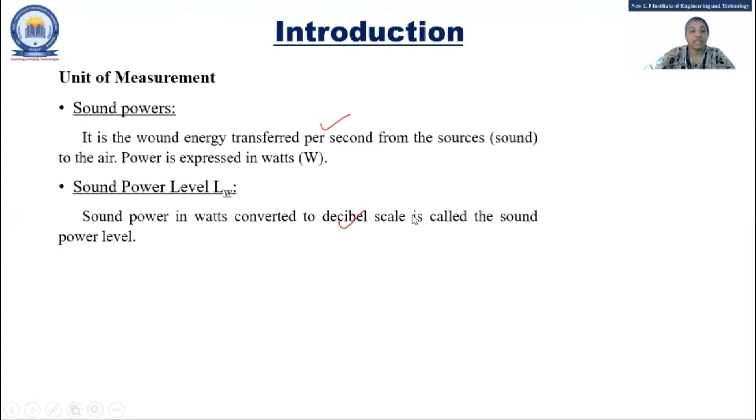Same way, sound pressure is the amount of air pressure generated by the fluctuation from the source of the sound, measured in Pascal. If that is converted into decibel, it is called sound pressure level. So normally these are the measurements for noise pollution.

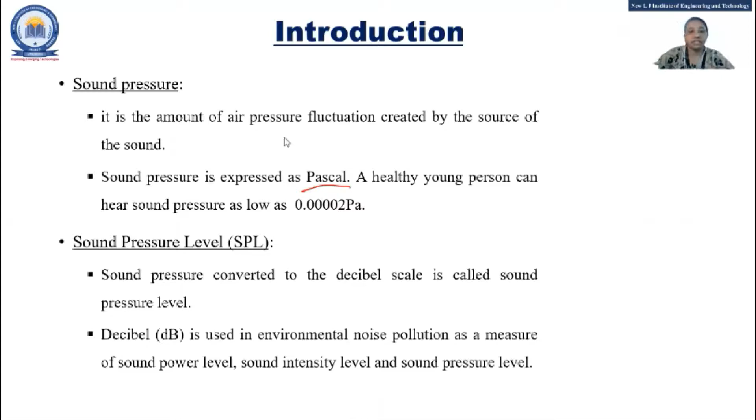Normally it will be measured in that term, pressure and the other is sound power. Now after that, we have seen the noise rating system.

So we know that if we are going to measure the noise for some interval of time, it may be continuous, intermittent, or in an impulse. So there will be a different pressure level at different intervals of time.

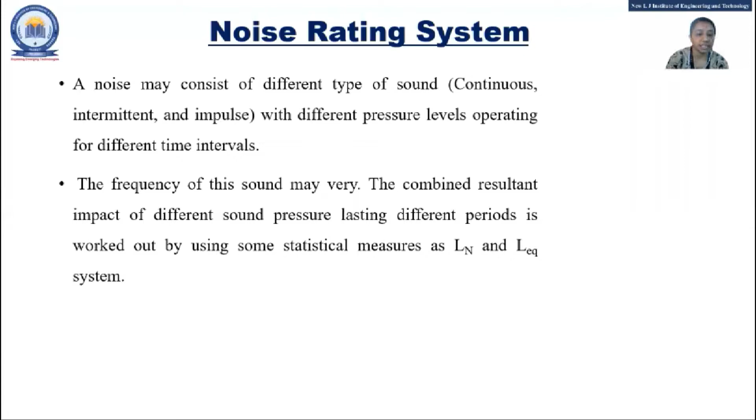So how to measure that? For that, two statistical measures are used, Ln and Leq. Ln, that means what? By example, we have seen that, for example, the given 70 dB is the value of L60. That means Ln, L60 equals 70. So what is the meaning of this?

It means the sound level will exceed 70 dB for 60% of time. That means if we are measuring for 3 hours, then for 60% of 3 hours the sound will exceed 70 dB.

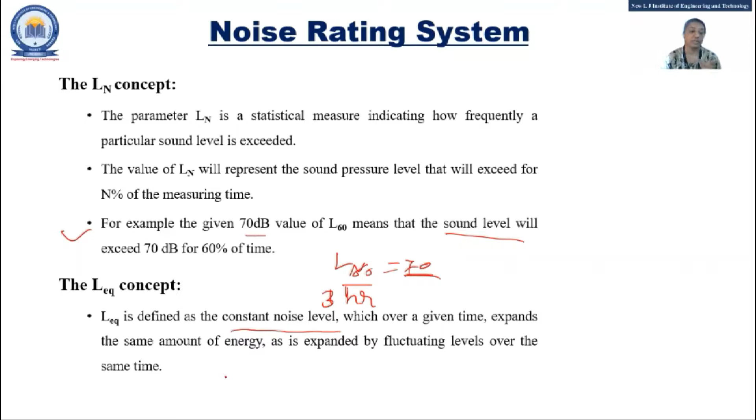So that is the meaning of Ln. And Leq is defined as the constant noise level which, over a given time, expends the same amount of energy. So whatever fluctuation level occurs over time, that is nothing but Leq. So this is the noise rating system.

Now some ambient standards have been specified according to area. You can see there are 4 categories: industrial area, commercial, residential, and silence zone. In that, the decibel levels for noise are defined for daytime and nighttime. Industrial area can be understood well by the name itself.

Now silence zones, that means what? Can anyone define which zone will be considered a silence zone? Anyone?

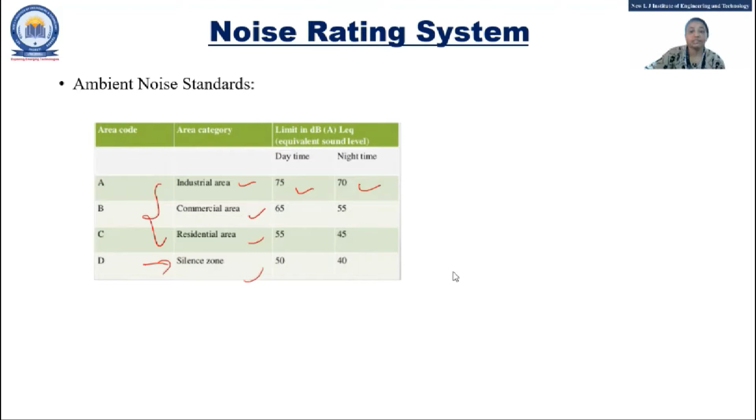Yes, which zone will it be? So whatever zone is near the hospital, near the institute, suppose any court is there, or library, school - that means any institute, right? So the area which is near to this type of things will be considered as the silence zone, with daytime 50 dB and nighttime 40 dB.

Fine, so this is what is called the ambient noise standard. Then what happened is the acceptable noise level for the residential area - so again it will be divided into outdoor and indoor.

So indoor means the sounds of TV, radio, music room, hospital, if any auditorium is there, conference room, private offices, libraries, restaurant - all will be indoor noise level. And outdoor means rural areas, suburban area, urban area, residential area, city area, industrial area. So this will be divided mostly into two parts, indoor and outdoor.

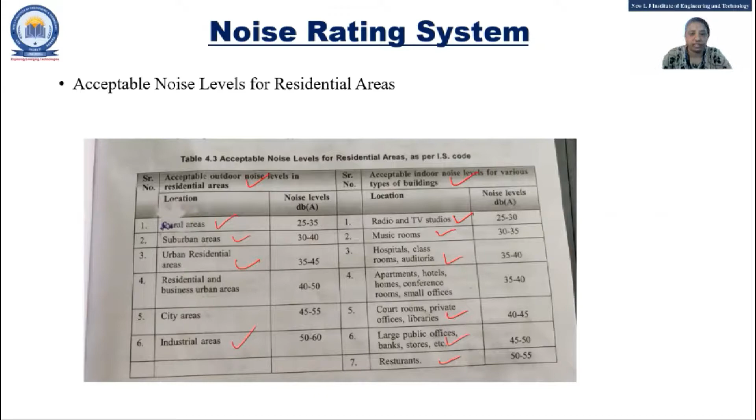That much we have seen, right - the noise rating system, the ambient standard, and the acceptable noise level for the residential area. After that come the sources - whenever any pollution is there, what is the source of that and what is the effect of that, that will be the main questions. So there are four categories, classified into four ways according to the source: traffic source, industrial source, constructional source, and other miscellaneous source.

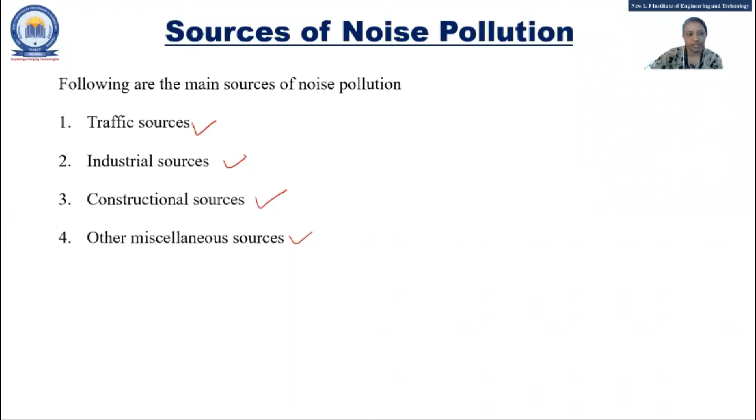So we'll start with the traffic source first. This source is an easy one - without even reading from the book you can write it down if asked. Traffic source means it will include any vehicle used for transportation, like truck, tractor, train, bus, or aeroplanes - whatever things generate noise. That is called traffic pollution, and because of them air pollution is also supposed to be there.

And the examples given are like the horn of vehicles - we blow the horn many times even if it's not required. Then also a vehicle with a damaged silencer will produce some noise from the silencer. The noise produced by a diesel car will be more than that produced by a petrol car.

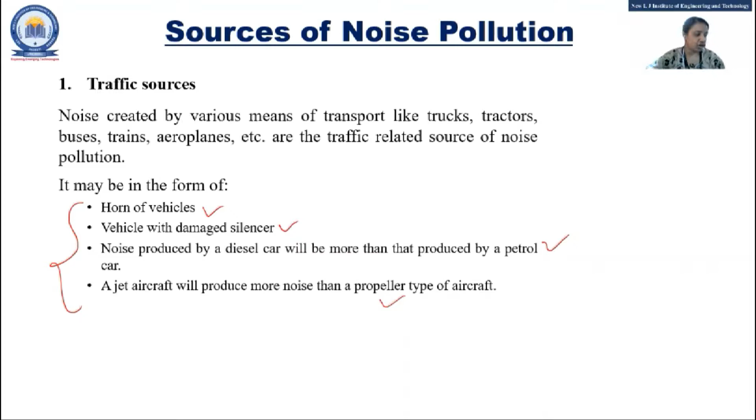Whatever noise we have also observed, the jet aircraft will produce more noise than the propeller type of aircraft. That means the main thing is the noise generated because of the unpleasant sound that comes from the vehicle. So these are all called the traffic sources. The next one is the industrial source.

Industrial source means we know that if nearby us any industry is supposed to be there, the noise will be produced, or we have observed that surrounding us if any construction work is going on, then also it will make a problem.

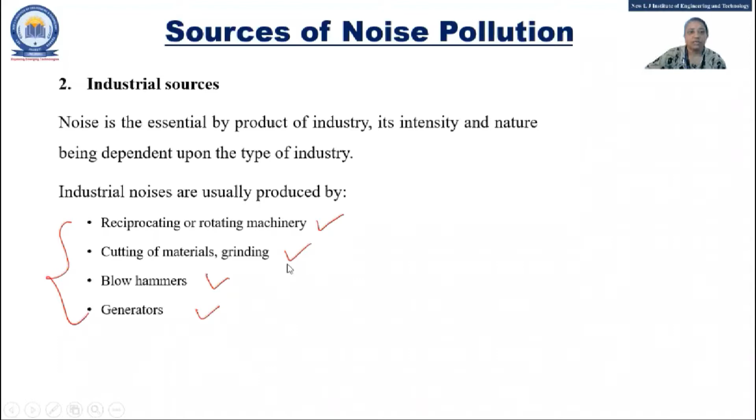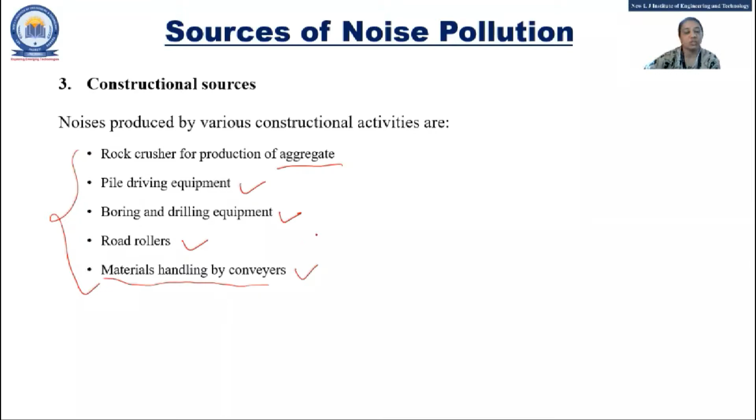First we have seen traffic sources, then industrial sources, then the constructional sources. They have defined it separately from industry because so many noises are generated from that - rock crusher for production of aggregate, driving equipment, drilling equipment, road rollers, materials handling by conveyors - they also make so much noise. So whenever the construction site is there, the noise coming from that side is more.

Okay, the other one is the miscellaneous source. That means it will again be divided into some parts according to where, or what is the source of that, in a residential area.

The loud voice of TV, music system, radio - that we have observed, right? Whatever the neighbors are used to, whatever volume of TV or music system is there, for us it may be louder, so that will be noise for us. Public address system means public functions or festivals, say like Diwali, then noise of crackers.

We can say if Navratri, then the sound of a music system - so that will be public address system. Any other example can you give of public address system? Festivals, Navratri, Diwali, then any other public function which will be a source for noise.

All are there, na? Yes, Uttarayan - so many noises there in that also. Yes, political rallies. So if any marriage is there, then yes - so most of our functions are sources of noise pollution.

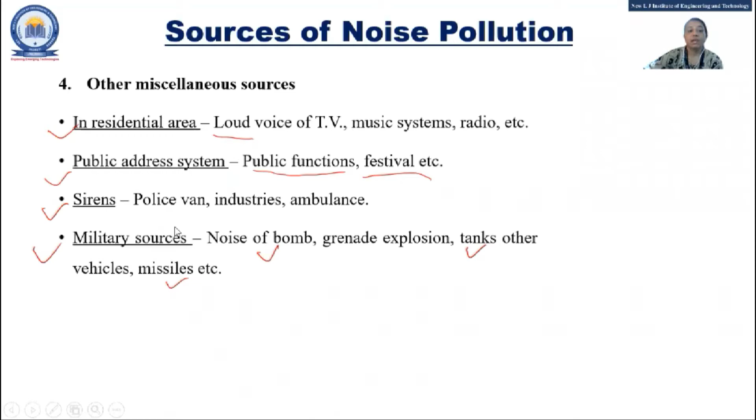So these all are residential, public address, sirens, and military sources - these are the four types of sources of noise pollution. After that, what about the effect? The effect can be categorized into 5 ways.

You can see loss of hearing - if the noise is for a longer time and continuous for, say, the whole day, longer time, and it is loud, then loss of hearing can occur. Annoyance. Health effect - what are the effects on health? Then interference with communication - if a serious meeting or communication is going on, it will be affected. Then working efficiency - we will see that too.

The first point is loss of hearing - so we'll see what to write about that. Loss of hearing will occur due to exposure of noise, which is termed artificial hearing loss. This is divided into two parts, as I have told you.

It may be for a shorter time or a longer time, and according to that it will be divided into two parts: the noise induced temporary threshold shift, named NITTS - noise induced temporary threshold shift. This is caused due to exposure of a loud noise or music, anything, like the bursting of crackers.

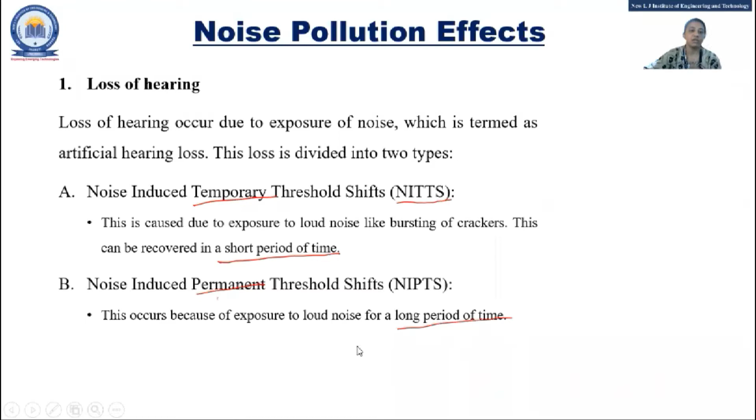The next is annoyance - this is the subjective matter of noise. As we defined noise earlier, it depends upon the situation and circumstances. For example, someone playing guitar - for them it is a sound, but for others it will be a noise, same with classical music. So for someone it may be considered a sound, for someone it will be considered a noise - this is annoyance.

Health effect - health effect will be the effect on physical health and effect on mental health. There are two types in that, and maybe it is not given in the book.

Okay, take a screenshot of this - second, third, and fourth point. This isn't given in the book, so just take a screenshot of that. That is fine. So health effect, that means what?

The effect on physical health and effect on mental health. Again, in effect of physical health, there are two types: auditory effect and non-auditory effects. So auditory effects, that means what? They are grouped into short time and long time effect.

That means what? We can say acoustic trauma is caused by very high intensity impulsive noise of about 150 dB or more. So if the noise measurement is more or about 150 dB, then there can be a problem on human health.

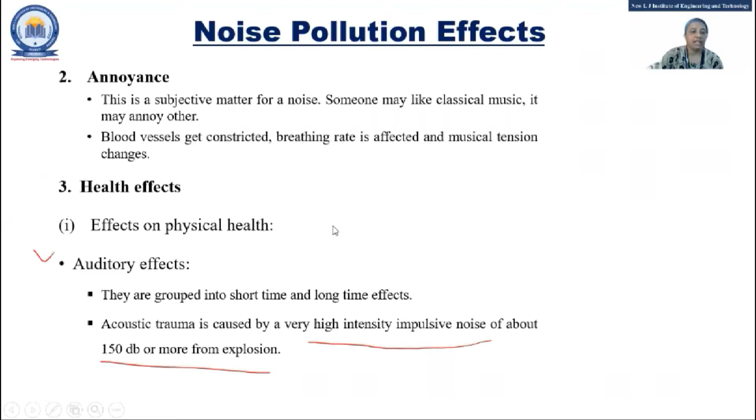Okay, so that is the non-auditory effect. Again, effect on mental health and physical health - in physical health, it will be either auditory or non-auditory.

Effect on mental health: because of noise pollution, there will be a very less effect on mental health, right? It is not that much level as it will be because of some gases, like we have seen in air pollution. So there will only be less concentration if any noise is there for some continuous time.

Interface, fourth one - interference with communication. That means what? If we are talking or some meeting is going on, then the person may face the problem of trying to understand what is being conveyed by the other person. If there is any background noise or something like that, then it interferes with communication - we are not able to understand the concept.

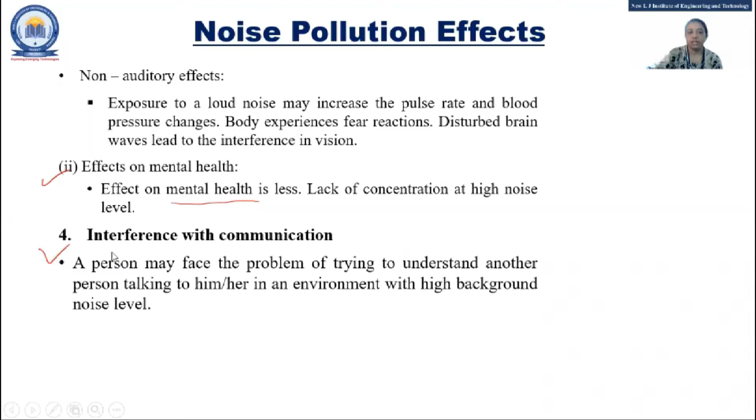Okay, so that is fourth number, interference with communication. Working efficiency - sometimes our work area is in such a noisy environment. Surrounding us could be some industry or firm which will be the main source of noise. At that time, what happens? Our sleep is disturbed.

There's increased industrial accidents, and personal comfort interference - that means whatever our schedule is, because of the noise, it gets disturbed. Property value degradation, yes, that means what? Can anyone give an example of that?

There's also an effect on wildlife - that means if any noise is there, it will affect the animals too. Can anyone give the example of this property value degradation because of noise pollution? Can anyone? How will it be there?

You can say the situation of your house - if a property is near a source of noise, then we can say the property value is degraded. Can anyone give an example of that? No one.

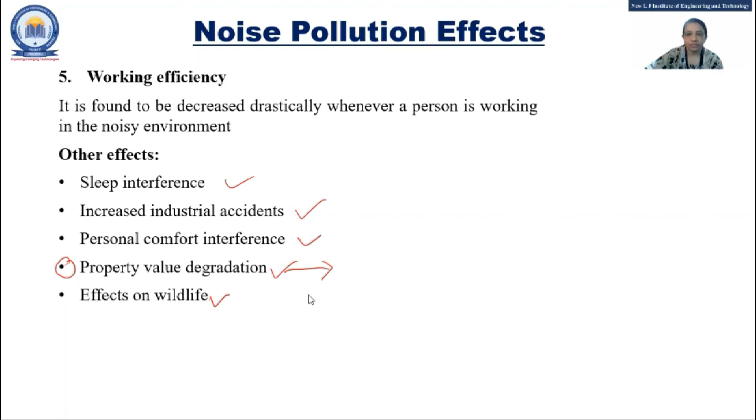Okay, now how to control it? So what are the sources, what is the effect, and how to control it - those are the main things. The proper maintenance and lubrication of machines can reduce the noise. We have seen that in construction sites, right? Because of machinery and all that, noise is there, or if it is any industry, or a house near the railway station as I told you.

If it is near the railway track or near the airport, that kind of noise source can be there. So proper maintenance and lubrication of machines is required. Then we may be able to reduce the noise. This control means we can't stop the process, but we can at least reduce it. Sources of noise pollution like heavy vehicles, airports, and noise-producing industries should be located away from what?

A residential area or a populated area. So mostly we have seen that airports are at the end of the city only, right? It will be far from the rest. It should be far from the residential area.

Silence zones should be created around residential areas, educational institutes, and hospitals. So we can say 1 kilometer nearby these residential, educational institutes, hospitals, or government firms should be considered as a silence zone. So whatever the standards are given in decibels, that should be followed.

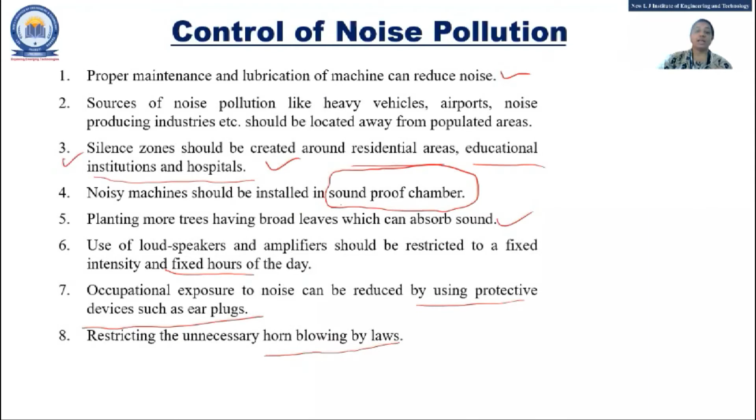So we have seen what is the difference between sound and noise, the rating system, what are the sources of noise pollution, what is the effect of noise pollution, and how to control it. Now, what questions are supposed to be asked from this? You can see: difference between sound and noise; discuss the effect of noise pollution and its control; short note on source and effect. So mostly you will find all the questions are on source and effect.

And sometimes it will be asked like: explain what do you understand by acceptable noise level. So in your own way you can explain what is the meaning of acceptable noise level, and briefly describe the sources and effects of noise pollution. Then, what is dB—decibel. Then how to control noise pollution. Mostly these are on causes and effects.

Discuss the control of air and noise pollution—so this will be from the same unit. Sometimes it will be asked in that way also. Or it could be about the effect on human health—just you need to write on human health, and it will be for 4 marks. So you can give examples also. In this way, it can be asked.

These are sample questions that we have taken from the GTU papers. So this is unit 2, covering air pollution, water pollution, and noise pollution. After that, there is one more topic, and if you refer to the book, that will be in a separate chapter—I think chapter 4, noise pollution—but it will be covered in unit 2.

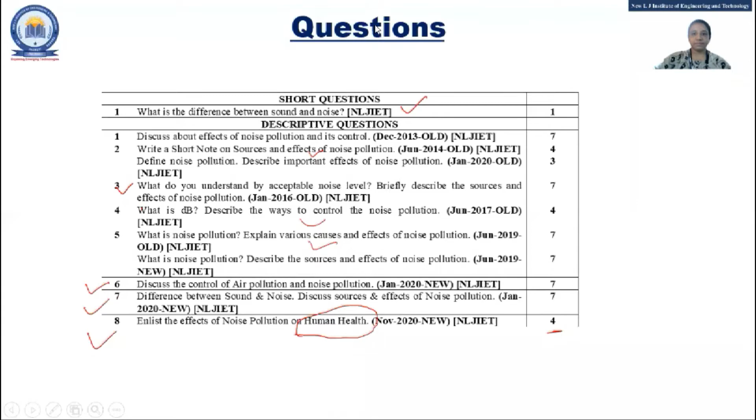Now, the next topic we are going to start today is solid waste. There are 3 types of waste: solid, biomedical, and e-waste. So we will start today with solid waste. I'm ending this session, just rejoin for another 20 minutes. So the last topic in unit 2 is solid waste, biomedical waste, and e-waste. Today we are going to cover only solid waste.

So in that, whatever waste is there, it will be divided mainly based on how it will be generated and how it will be managed. Normally, whatever question is asked depends upon these 2 criteria: the generation and management of either solid waste, biomedical waste, or e-waste.

So, what is the meaning of solid waste? Can anyone tell me examples? According to you, what is e-waste? Already we have discussed this in unit 1 also, right—electronic waste. The computer and IT people manage it very carefully, e-waste—what material is used to make an electronic gadget and all. Biomedical waste—what is the meaning, I am asking. Solid waste and biomedical waste, can anyone tell me?

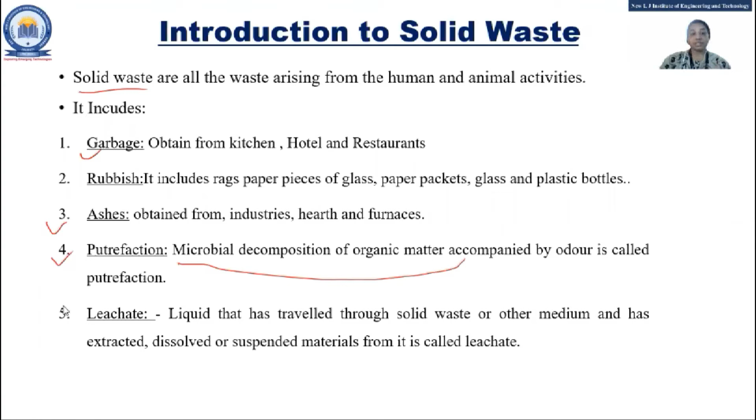So that we will see how it is supposed to be managed. Okay, so first we'll see what are the types and sources. So normally this waste is going to be divided into three types, that is municipal waste, industrial waste and hazardous waste. So municipal waste, that means what? Can anyone? Municipal waste means it is the waste that will arise from the home, or we can say any household activity is there, right?

Any household activity is there. So whatever waste is generated, that will be called municipal waste. It can be either from any public places, any restaurant, any market, or any street. Whatever waste is generated, that is called municipal waste, right? Some functions are there. So all the things will be generated, that is municipal waste.

Industrial waste, that means what? If any industry is there, if any manufacturing activities are supposed to be done, then whatever the rubbish, whatever the ashes are generated, that will be called industrial waste. So next is the hazardous waste.

Hazardous waste means it will contain some toxic substances, and it will be very harmful for human beings or animals. Some symbols are used for that type of waste. Normally it will be radioactive substances, chemical waste, biological waste, nuclear power plant waste. Whatever waste is generated containing toxic compounds is very harmful for the earth as well as animals.

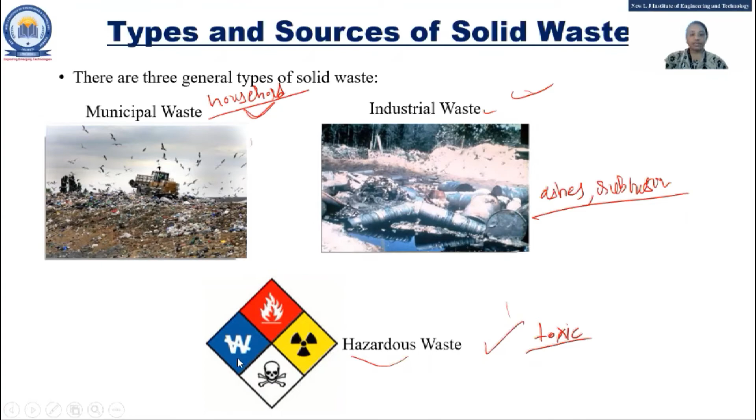So these are three types of waste. Now, because of what is the solid waste generated more and more? That is because of four main reasons: overpopulation, technology - right now we know technology is growing very fast - urbanization, and affluence.

Overpopulation, that means what? How will it affect the generation of solid waste? That means the number of people increases with overpopulation, so the need of everyone always increases. So whatever the use of all the things are, that is supposed to be more and more because of more population. So solid waste is generated more.

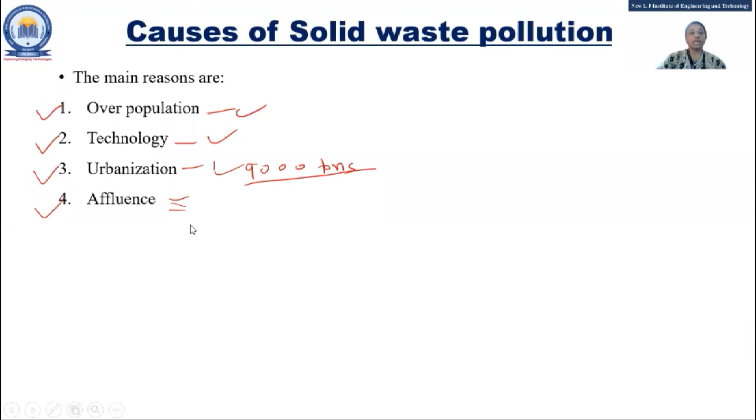Affluence - that means what? Right now, the trend of fashion is there. Suppose we bought something that's running, it will be there for one or two months, then it goes out of fashion. So what we do is just throw it away. Because of this, solid waste pollution is increased. This is nothing but affluence. So these are the causes of solid waste pollution.

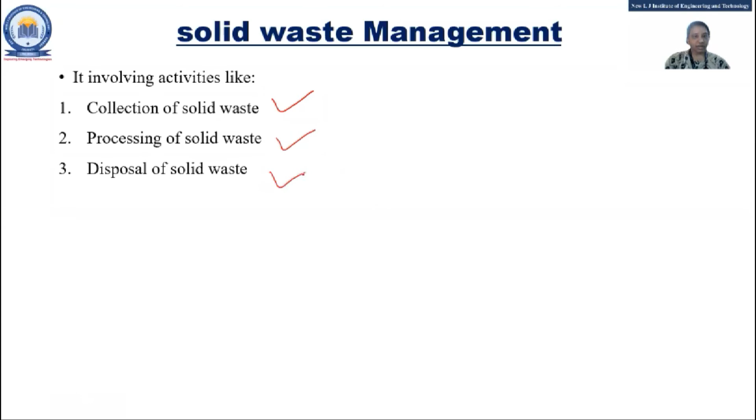The next is how to manage solid waste. Mainly it is divided into three activities: how to collect the solid waste, how to process the solid waste, and how to dispose it. There are three main parts of management: collection, process, and dispose.

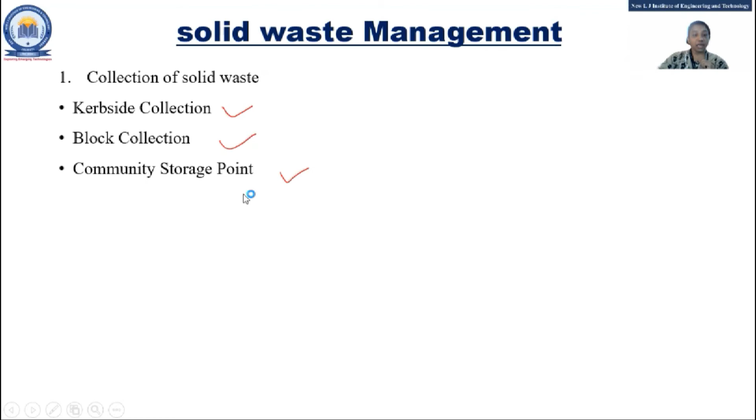In collection, there are three parts: curbside, block, and community storage point. So curbside means the house owner itself is responsible for the disposal of the waste.

We will see that in the last unit, how to reuse and recover. Now the workman will come, collect and empty the container. After that, you have to take your container back from the curb to your house. So this is curbside collection.

That means the house owner itself is responsible for putting the container out, waiting for it to be emptied, and then collecting it back. So that is curbside.

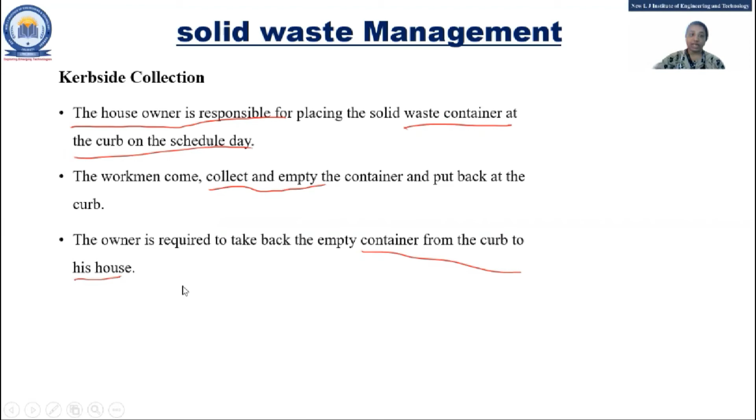Next is block collection. In this, individuals bring the waste container and hand it over to the collection staff. That means a vehicle comes in our city, and the house owners go with their container, and the person in the vehicle empties the waste into the vehicle and returns the container. So that is called block collection.

Community storage point means there is a storage bin placed at a fixed area, sometimes at the end of the street. We need to drop our waste there, and there will be a schedule according to which they collect from that storage bin. So this is community storage point, along with block collection and curbside collection.

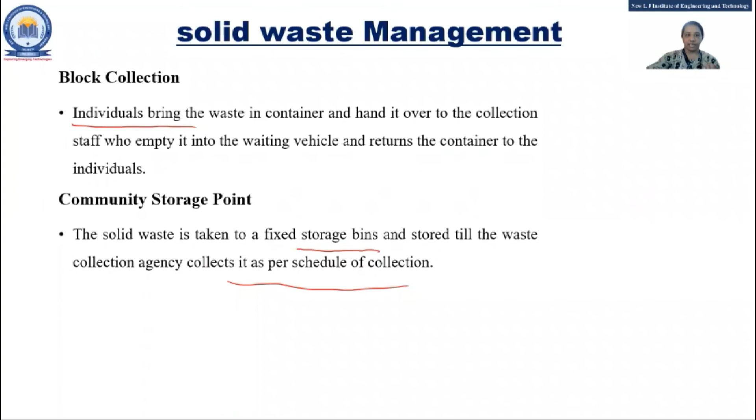Now, how to process it? Processing techniques are used in the solid waste management system to improve the efficiency of solid waste. That means it's not always true that whatever we throw will remain waste only; you can do some processing on it and recover something from that.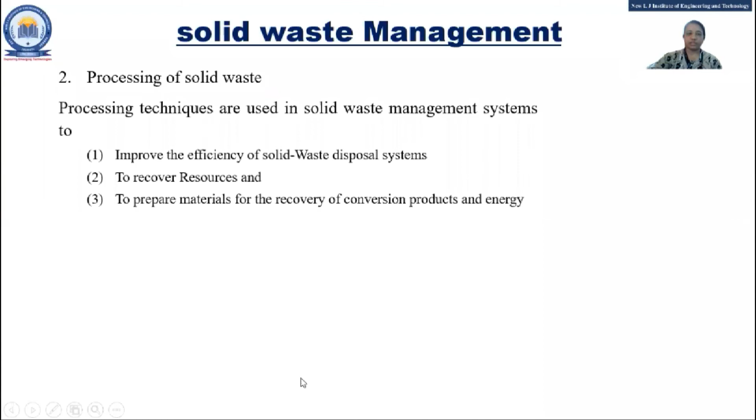Fertilizers can be made from that. Whatever household vegetable and fruit peels are there, those can be used as fertilizer. So whatever reuse we do, we prepare the materials for recovery, conversion, product, and energy. This is not covered in much detail, but some processing is supposed to be done.

Disposal should be economically viable. It should not create a health hazard, meaning the disposal of waste should be done in such a way that it is not aesthetically unpleasing. We have seen many areas where waste is dumped and the area does not look good. It should not cause environmental effects, and it should be disposed of in such a way that it can be recycled. This is how disposal of waste should be done.

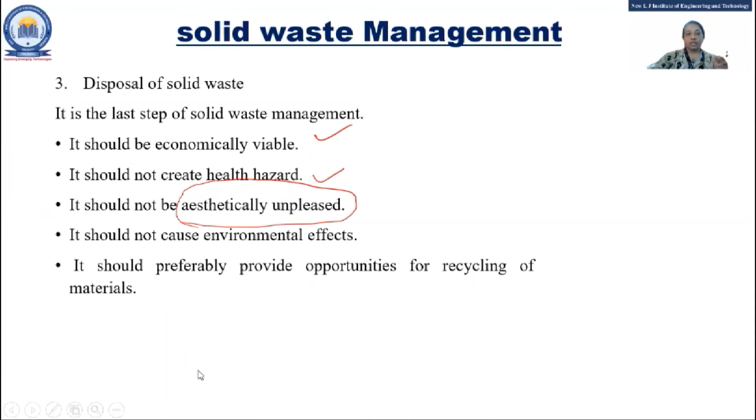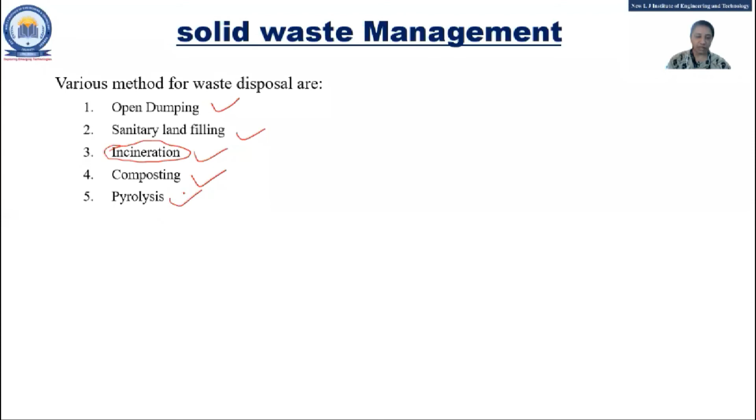There are 5 types of various methods for disposing of waste: open dumping, sanitary landfilling, incineration (which we have seen in air pollution), composting, and pyrolysis. First is open dumping, which you can see in the figure itself, at the outskirts of the city area, used for this purpose.

The dumping of waste from all over the city is the most common method used in India. So what happened because of that? You can see bad odor is supposed to be there surrounding the area, and if that waste is burned, air pollution results.

It requires a large area. If we talk about Ahmedabad only, a very large area is used for dumping of waste, and the people living in the surrounding area suffer from this.

Some gases are also released, because if waste stays for many days, some processing happens and gases are released. Also, breeding of flies and rats occurs, which has a bad effect on the health of people. So open dumping is a simple method, but it has many disadvantages.

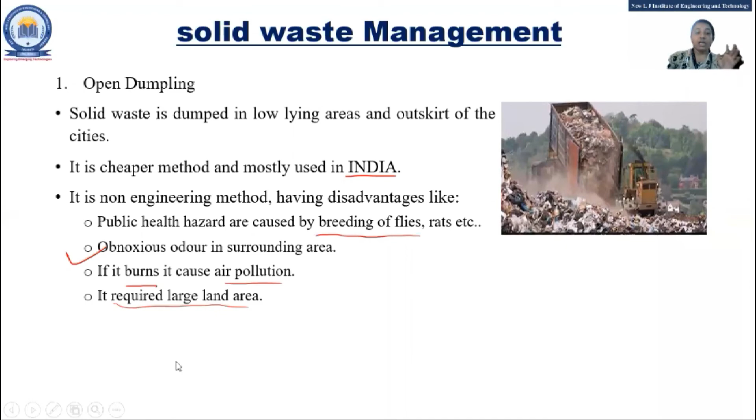Now sanitary landfilling, what does that mean? As you can see in the figure, the waste is dumped into an area below the ground level. It can either be created, or it may already exist outside the city - that is called a sanitary landfill. Solid waste is disposed either naturally or through specific arrangement. It is divided into two methods: area method and trench method.

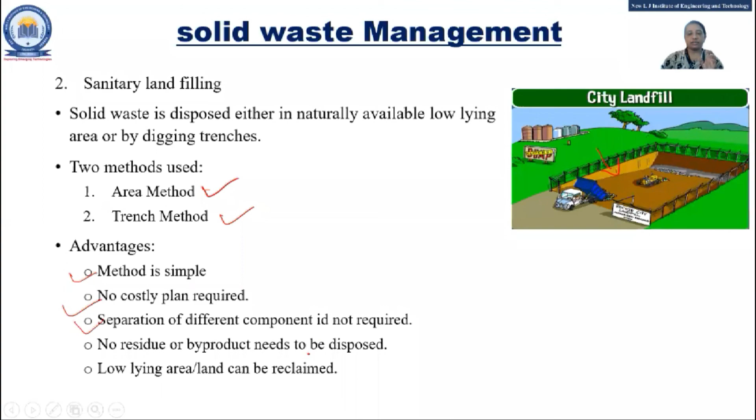Now what is the advantage? It is very simple, there is no cost required for that. We don't need separation of different components again. So there are many advantages of this - it is an easy method.

The next question - what are the disadvantages? The proper dumping site may not be available, meaning this kind of arrangement may not exist, so we need to create it. Large lands are required because the waste generated from cities is more. Odor problem is the same as the previous method. These are the disadvantages - we need land, and so on. But it is better than the previous one, since instead of dumping in open space, this is more useful.

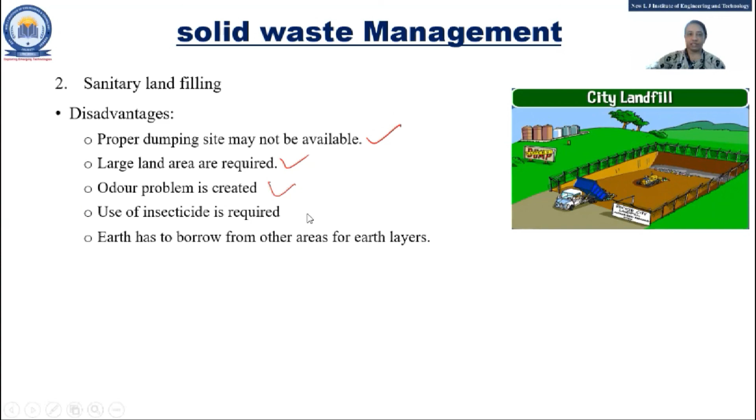Incineration - what does that mean? It is a method of thermal reduction, meaning the solid waste is burned. The main purpose is to reduce the volume - 90% of the volume is reduced. But for that you need to use a boiler. Gases are generated from that and the temperature is very high, so we need to use a system to control air pollution. That needs to be taken care of in incineration.

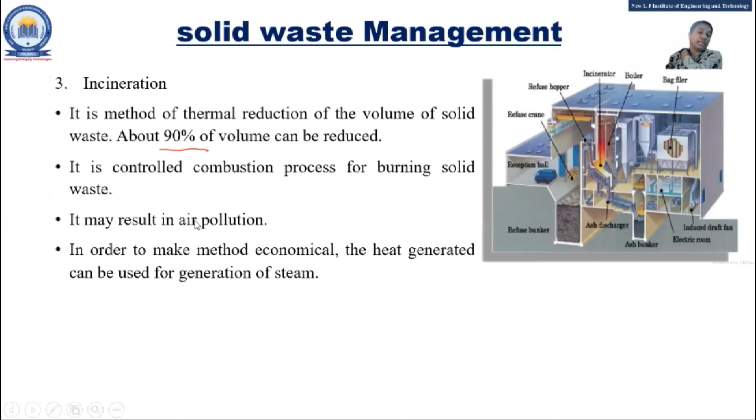The next is composting. What does that mean? Whatever household waste is generated, we dump it in an area, and it can be used as rich fertilizer, as we have discussed. There are three methods: trenching, composting, and mechanical composting.